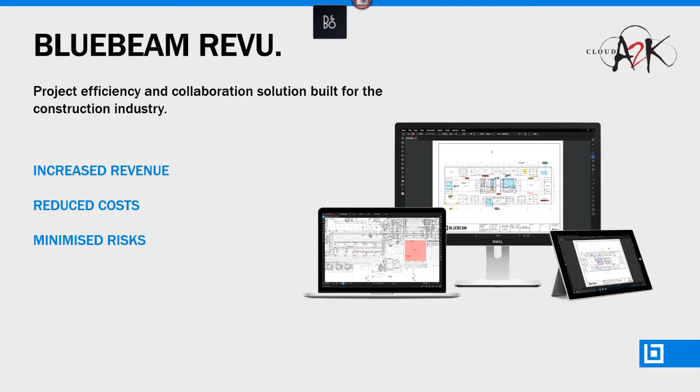So Bluebeam, it's all about going paperless. So we can get everyone in the same system, and we can cut down on the miscommunication that happens, because you'll have one electronic copy which will be worked on for all markups. It's easy to track changes and to track what's happened and who's made the changes. And changes can be made on site as well.

So the PDF contains a lot of metadata, so you can export pretty much a 3D straight from Revit or a native program. And with that, you can get data about what columns you're using, what beams you're using, and a lot of sizes, etc. You can hyperlink in it, use bookmarks, put heaps of attachments. So it's really becoming not just a drawing as such, it is becoming a metadata object, which is fully customizable, and you can investigate the model fully. So you can attach images, and a lot of the 3D data comes through on the PDFs as well.

So it's one file. You can do quantity takeoffs, collaborative review. You can share the studio so that many people can be in the one PDF at the same time. You can manage drawings through it, and have a file system all locked in a single PDF so that everyone can access the full data set. So documentation as well, and field issues. So someone on site can flag something, and that can be uploaded almost straight away using Wi-Fi, and changes can already be starting to be made back in the office.

So I'm just going to open Bluebeam now. I'm just going to bring in a drawing that we have set up, which is just this one here. So it's a small architectural dwelling. I'm going to also add in another sheet.

So the simplest way to look at drawings and compare them is to just simply split the screen. So we have a split screen function down the bottom here. So we can split horizontally or vertically, and split vertical. And this button here is the synchronize view button, so that synchronizes the views. You can also get to these through the View menu, and they've got split here, and synchronizing page, synchronizing document.

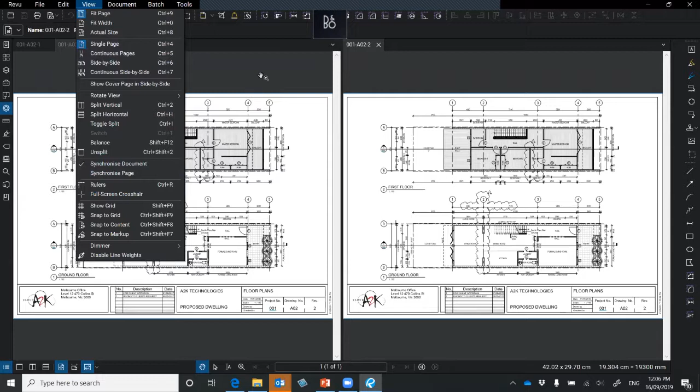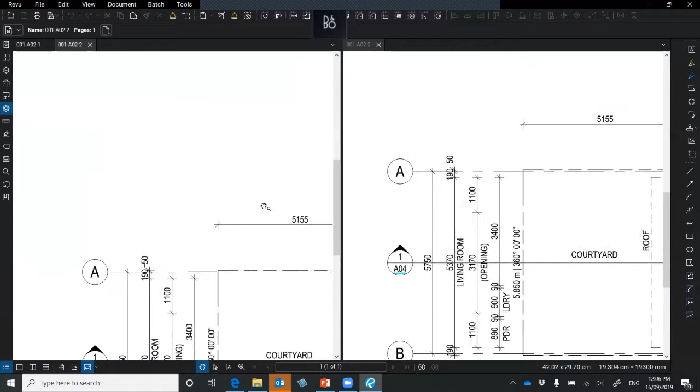So if we synchronize the pages, it will track where we are on the same drawing. So these are different versions of the same drawing. We can go through and see generally what changes have been made. It is a bit cumbersome, and there's better ways to do it. So we're just showing here how it will flow around. And this is the simplest method and closest method to just printing out two different drawings and just following through the changes.

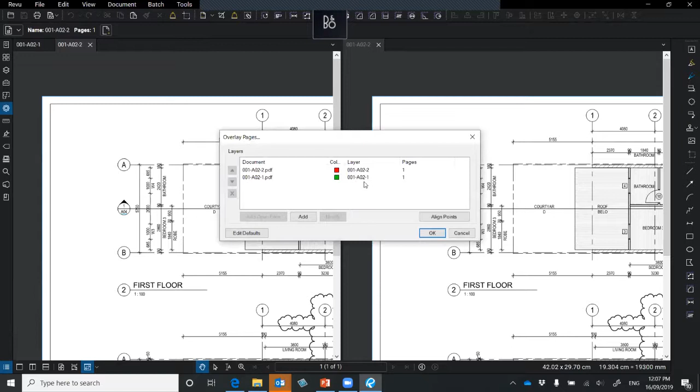So now we're going to overlay the documents. So we can pick that we want to overlay these two drawings. Just say okay, and what that will do is create an overlay drawing. I'll shut this one down for now. Go back to our single page. And what this has done is this has just overlaid the drawings.

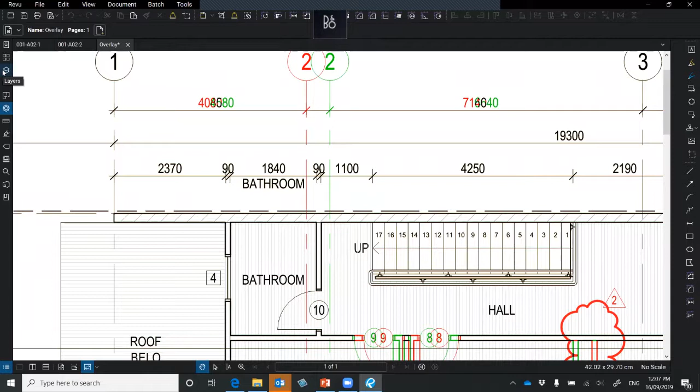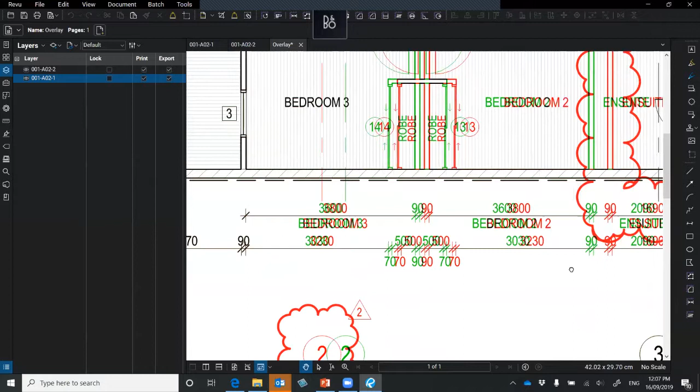We've got the red, and if we look through our layers here on the left, that tells us what drawing is laid on. So we can turn each one of these off. We can see small changes that have been made. Grid 2 has obviously moved. A few changes around the bedroom. Ensuite's changed. This has changed. So that's the simplest overlay, which will just overlay the drawings and show you what's changed between versions.

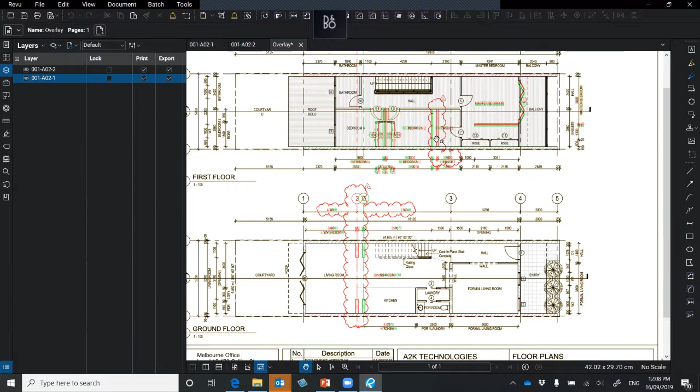So you do want to use this. This is handy when you've got people using the same drawing, but they're showing different things. So you might have an architectural plan or a structural plan, and you can bring the MEP plan straight on top. And that's really the difference between overlay and compare. So overlay overlays the drawing and just gives you a basic view of it and how things have changed. It will highlight each. You can overlay more drawings.

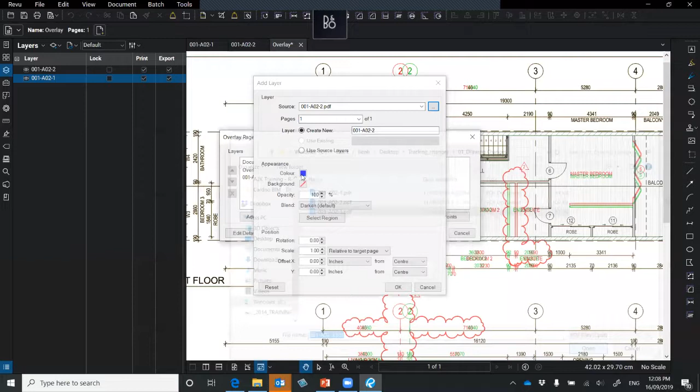So you can easily just add in another one by going back to document and overlay, then we can add another file. We can path that through to this file, bring in that as well. And this is where the appearance of that file, so this new one I'm adding in, will come in as blue. And it will create a new layer on top of that, which I can then turn off and overlay. So it's good for overlaying architecturals with structurals and the like.

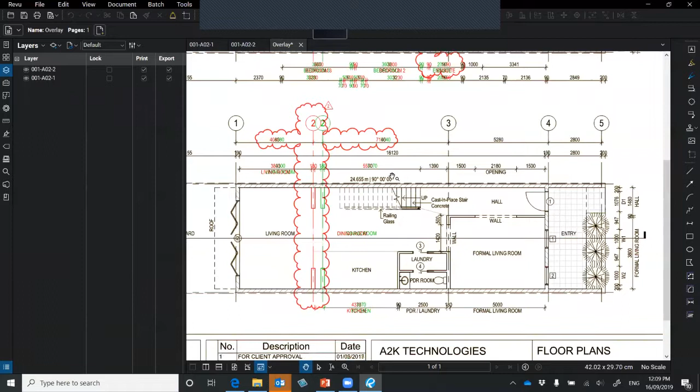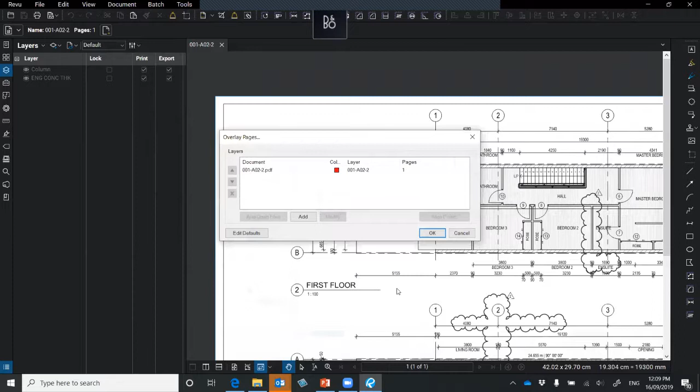If you did want to compare plans that were exactly identical, you'd probably use the compare feature, which I'll show now. So what I'm going to do as well in overlay, I'm going to add in another document now which doesn't line up. So if we overlay drawing 3 here, bring that in, it's going to come in as green. And everything we can see has been shifted, which will happen in a common drawing environment. So the way we fix that is now we know that the files are not aligned. So we'll exit out of both.

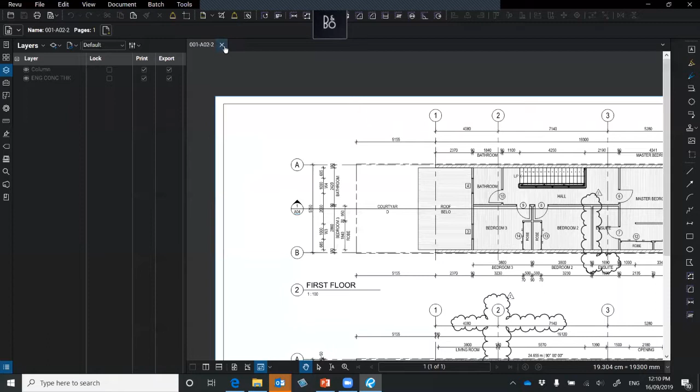Now we'll get through the command just through here. So document, overlay pages. And I'll pick 2 and 3. Attach both of them. This is where we can source, so which page we want to do, where we want to create it, use the source layers, the different colors of the backgrounds. So we'll have the 02 as red, and we'll have the 03 as green.

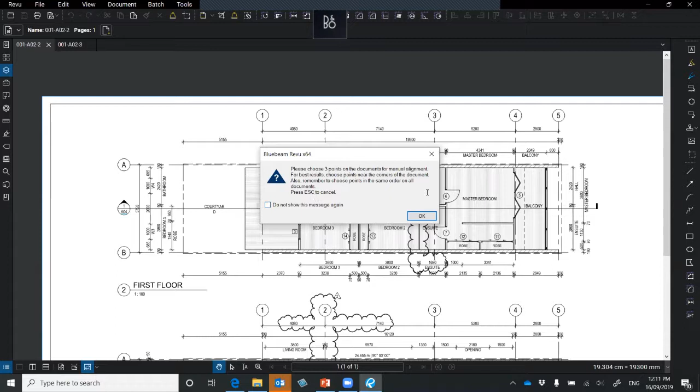And then we get to the next point, which is align points. So we know that they don't line up. The best way to line them up, so it comes up here with a little dialogue: please choose 3 points on the documents for manual alignment. And for best results, choose corners of the document. So we're going to use the boundary because, as we know, grids may change, rooms may change. The drawing sheet, depending on if it came from someone else, may change. But if you're bringing in an architectural and maybe a mechanical drawing, everyone will be using the same boundary. So we'll use the boundary.

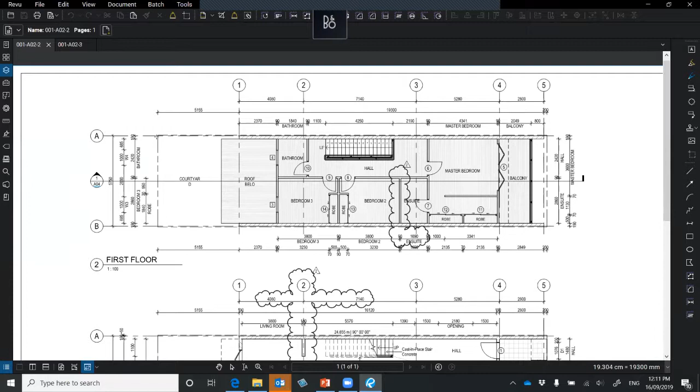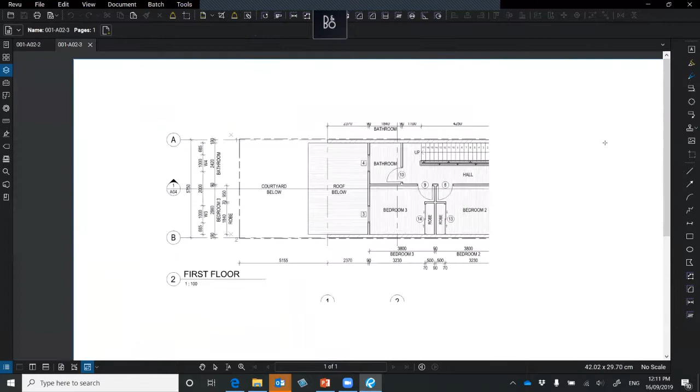So we'll pick 1 point, which will be the corner there, corner below, and the corner to the top right. And now we can see it's taken us to the second drawing, and we can see here that it's put in a grey 1, 2, and 3 over there, and they're the points where it's sourced from the original file. So we're going to correct those points now and give it the comparable points on our new drawing. And now we can see it's brought both those drawings in at the same.

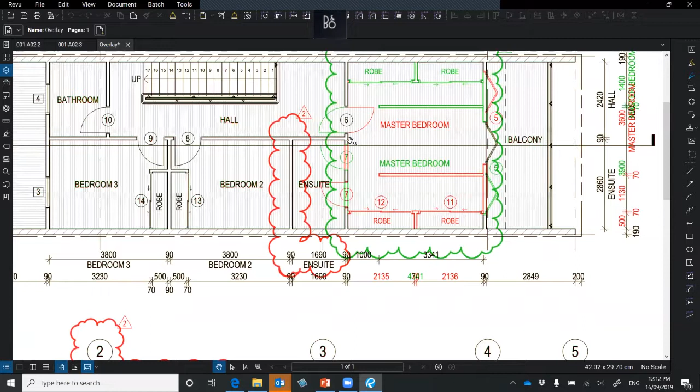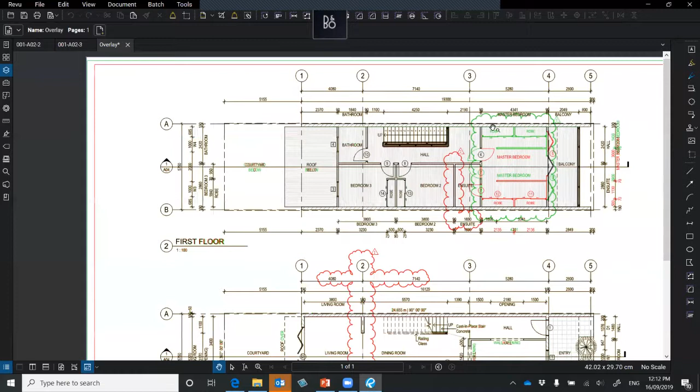We can tell that, especially with the title block, it's been in a different position on the page and it's moved it accordingly. Now we can easily see that the orientation of the master bedroom has changed. A few of the dimensions here. Now it hasn't wiped out the data from both. If you really zoomed in, you can see that it's actually overlaid the green and the red, and there is a small error of alignment there. That's where you can easily see what the changes have been. They've changed some of the wording. They clarified what the opening is in the door, in the wall, and the orientation of the bedroom.

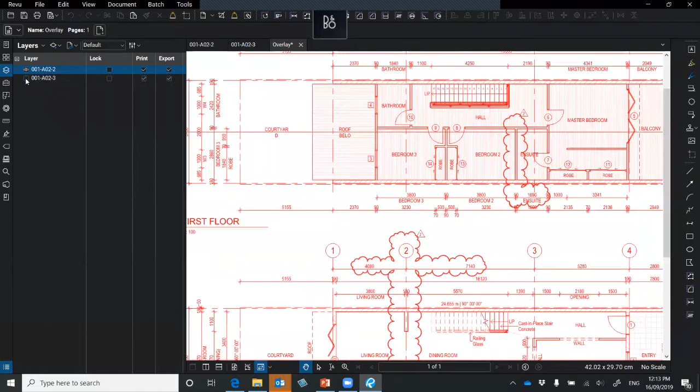So that's with overlay. It will still have the layers in here so that we can go back to each drawing in itself and look at those original drawings through the layers. It's created a new file, which is the overlay. So then you could save that as your overlay comparison page. Another simple way to do an overlay is to do a cut screen. So we can take a snapshot of the first one. So I'll now grab that snapshot. So I can go back into 02, 03 again.

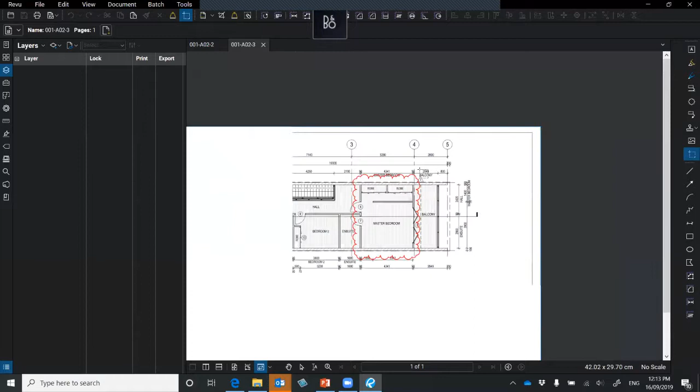And what I can do is paste in place, which will put it in the same place. Now I know that this one won't line up because it's drawn from where the drawings didn't line up. And the way to fix that again, I can select that, go to the properties. I can change the colors of everything that's come in. So that's the first thing I'm going to do, just to clarify for me which drawing I've brought in.

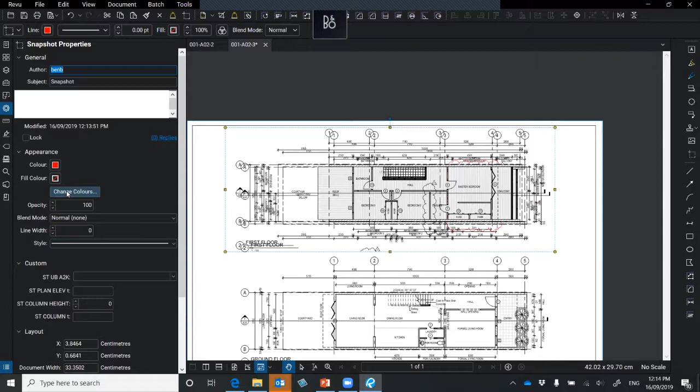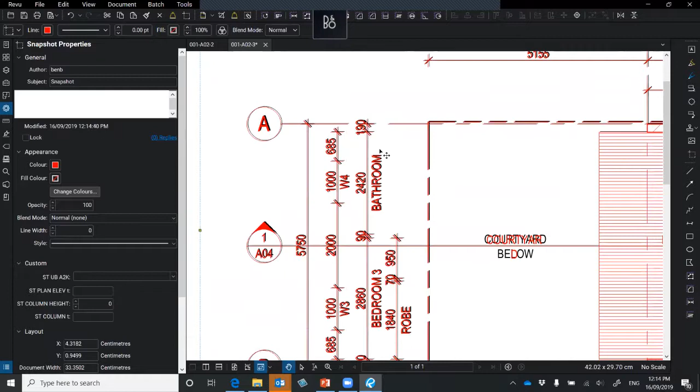So this is all the source colors here, which will change. So I'm just going to make everything red. So you've got to go through the different line styles that it's brought in. And that's probably about enough. Now I can also change the position to line up on grid A, to line up on grid 1. And I'm also going to change the transparency of that.

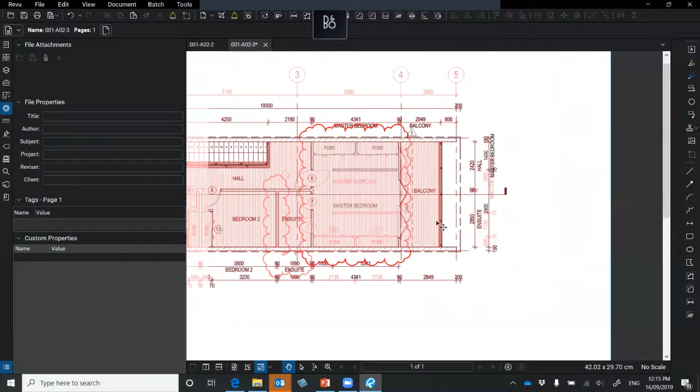So now again, we can easily see what has changed, what stayed the same. So that's another good way to do it. And you can do that for little part plans, even little key plans, little detail plans you have, even details on drawings as well. You can just do a cut and paste, drag it on and change the properties of that file that you brought on, and you'll see what has changed.

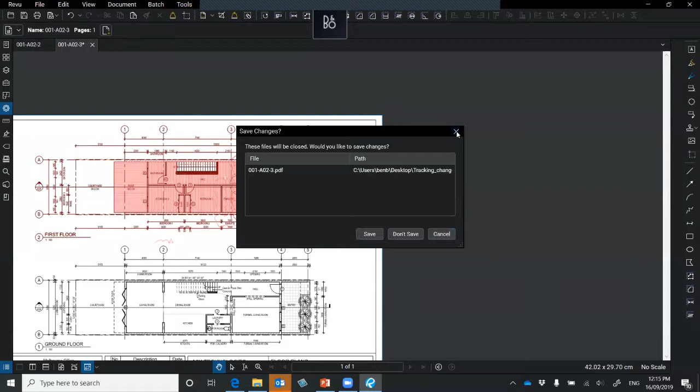So now we're going to show the power of comparing things. So I'm going to shut that down. And if we go back to my desktop files, I'm going to use both these files again, and I'm going to run them as a compare. So I'll go to compare documents, and it's asking for where I want to grab each one. So I'll just grab each one out of that folder, 01 and 02. This is where it's going to put our output drawing, output folder, so I'm just going to leave that there.

And it's got a few other options here. So manual alignment, again, you can pick the points as we did from the other one. It's got a few advanced comparison things in here too, where you can change the tolerance, the pixel, and what we want to show. So we want to show the difference of the things, and we want to cloud it, and we're going to lock those clouds. You can change the fill color of the cloud. I'm just going to make that a half. So I've got a strong color for the red.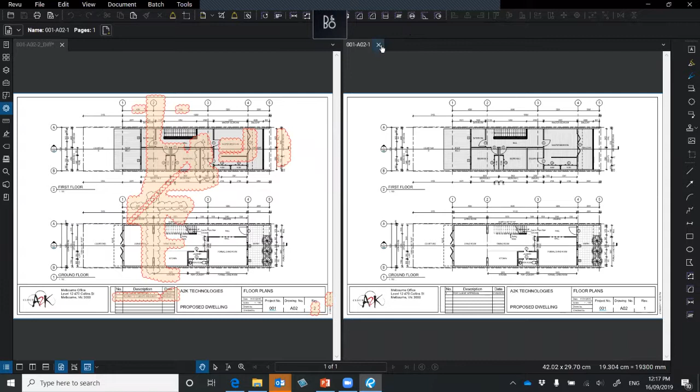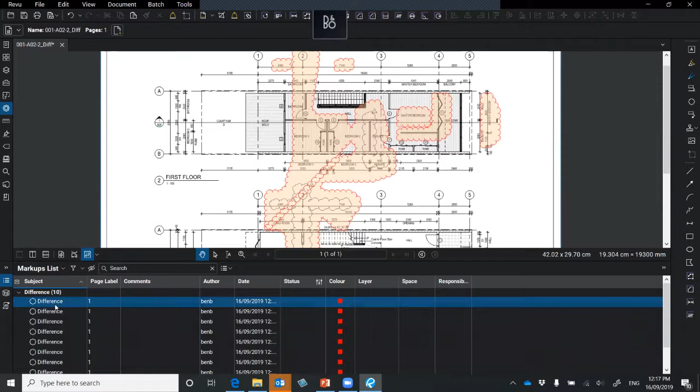So I'm going to shut this file now and just deal with our difference file. So we can see it's clouded all the changes. So it's a great way to cloud changes and show what's happened on each drawing between each revision. You can go through and each difference will be highlighted. So we might decide that we obviously don't want to know the difference in the revision. So I need to unlock the differences. That's just a matter of highlighting all, right clicking, going to unlock. So that will take them off.

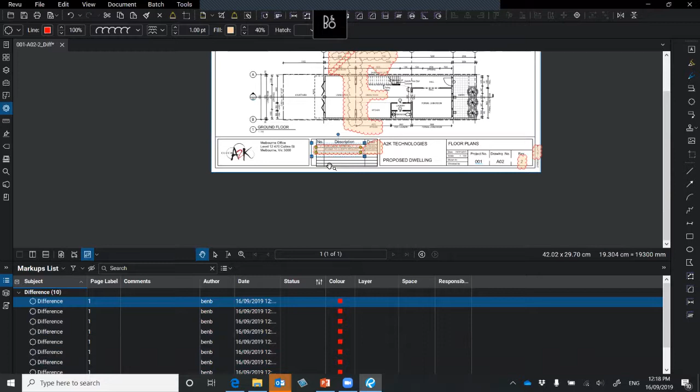And then we can go in here and we can delete that one, keep that one, go through and just highlight the differences, it'll take us to the differences in the drawing. There we go, we've got a clouded change of exactly what's changed in that drawing. So it's quite useful.

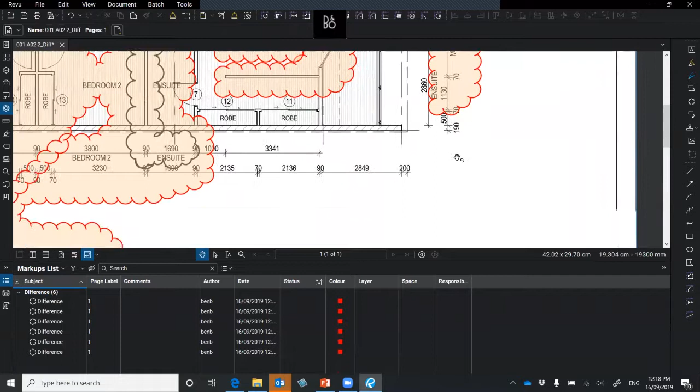What we can do is we can do a batch overlay. So we're going to do that now. So we have both the same features here, both compare and overlay, but we can do it as a batch. So that's where it gets the power if you've got 100 drawings. What we showed before was just if you've got a couple of simple drawings to overlay, but if we want to compare many drawings, what we can do is batch compare.

So we want to add, and we'll add a folder of all our drawings. So we have folder 1, which is 1st of the 5th. And we'll add another folder here of what to compare. So we can see the drawings it's grabbed out of each file. So the second revision had 5 new drawings. The old ones only got the 5 original and the new ones updated 2 drawings.

So we'll go to match pages, which will then pick out, okay, these are the 2 drawings or the 4 drawings that have been matched. So we can make sure we accept that, and the unmatched ones are these 3, which haven't changed.

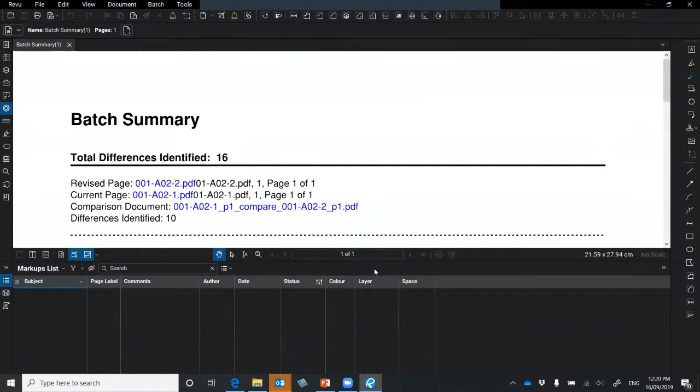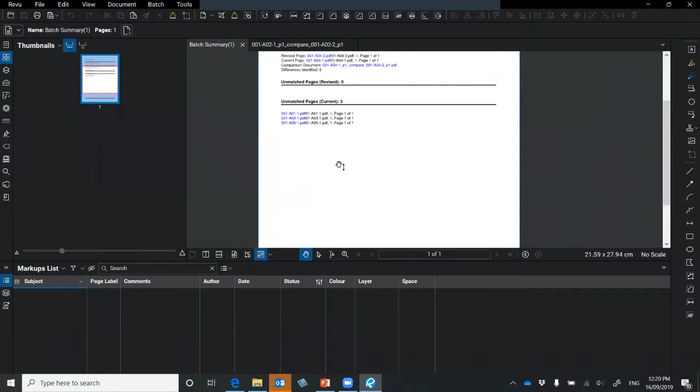So we're going to create a detailed report as well, which will be in PDF format. And what we get here as well is a batch summary. So this has given us a report of what it's produced in here. That is all hyperlinked through the file. So it's given us the information in here, the revised page, the current page, and what it's compared, the differences it's found. So 6 and 10 differences on each one.

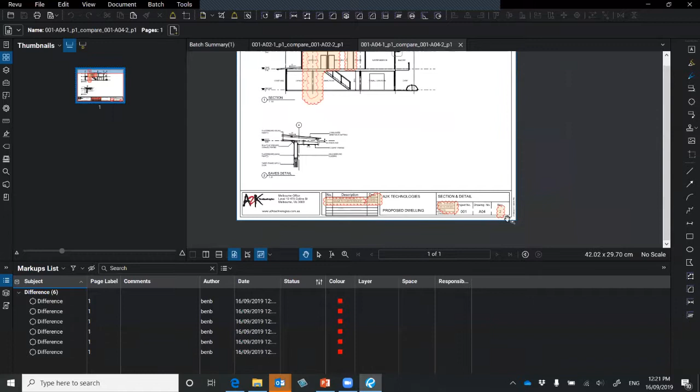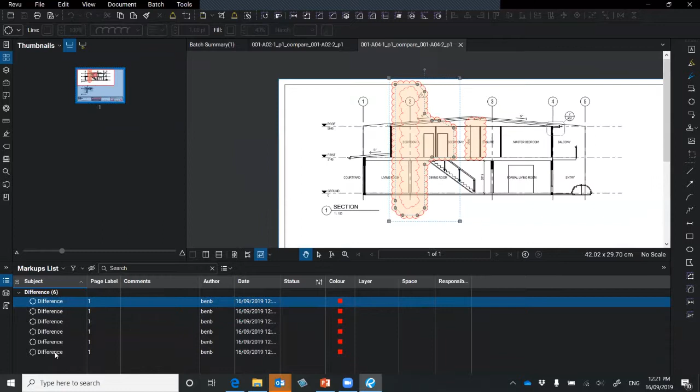And then we can use this to go straight to those drawings. So on our section, it's picked up those differences, and the grid change here. So again, you can tab through those clouds and delete the ones you don't want. I have set it as locked, so you will need to unlock if you want to make amendments to the clouds. So you get the 2 drawings done through, and then the batch summary.

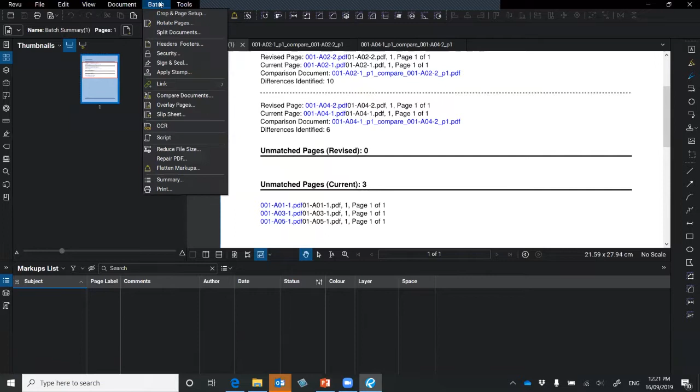So we'll go through that again this time, and we'll use the overlay. So I'll just shut those down. So I'll do a batch overlay through the same method, adding a folder. Match pages again. It's picked up the same errors. So you always need to make sure we create the hyperlink, which will allow you to go from the report to the overlays.

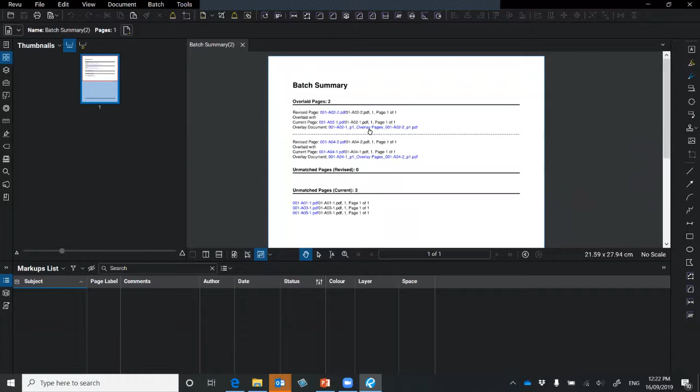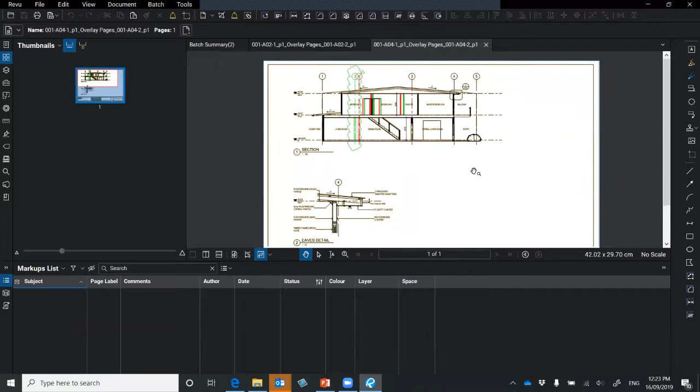Get the overlaid pages. That's where it's done it here. So you can see that grid 2 is changed. It's highlighted all the changes in each one. Same here. So it's a great way of tracking changes because, as we know, not all consultants will get their clouds right. We can see that they've just clouded the grid change, but they've actually changed the layout of the room as well, or location. So we get all these changes that they have made through the project. So it's a lot easier at a quick point to show how that would be done.

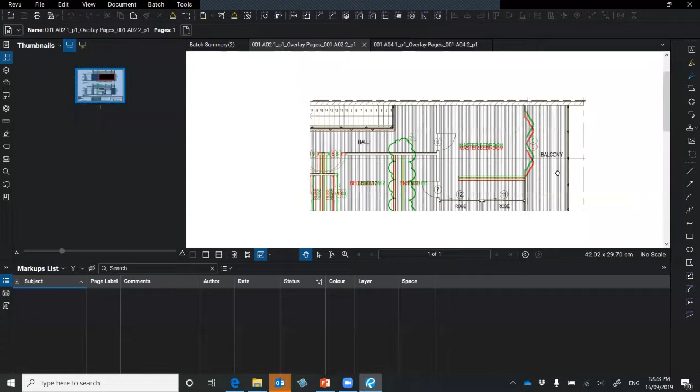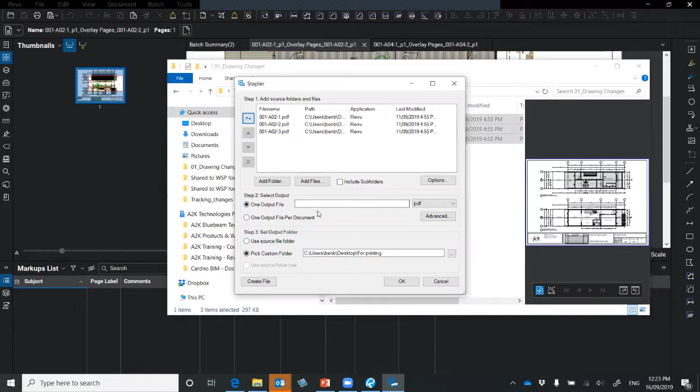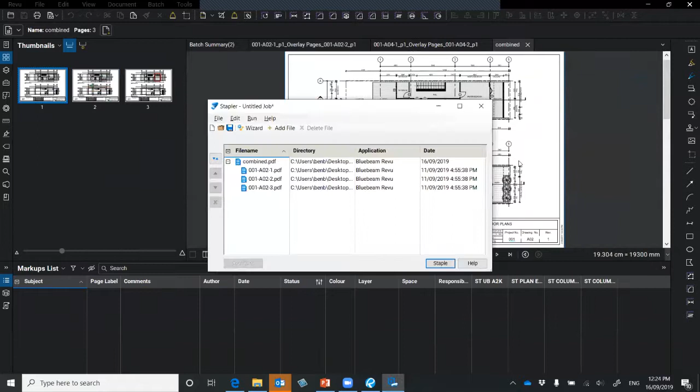Again, I did have someone that used one PDF that contained all these. So if these were combined, we can combine these files just by right-clicking, combining files, make the source output the same. So we can compare that with the other file. But what happens here, you have to always compare apples with apples.

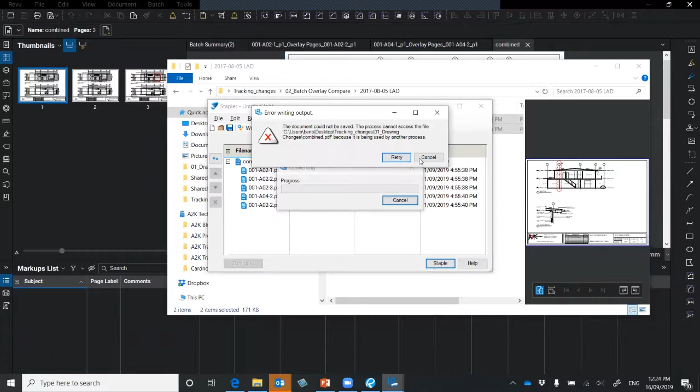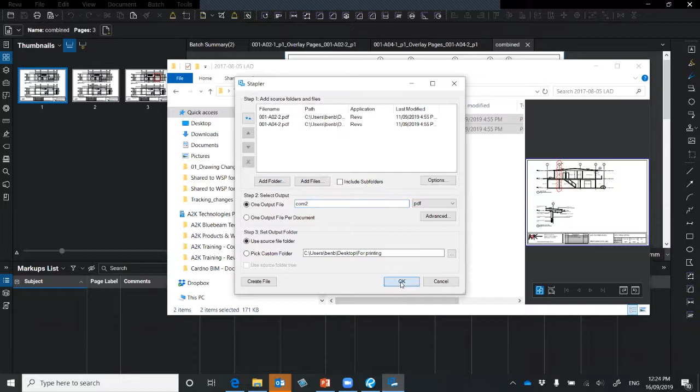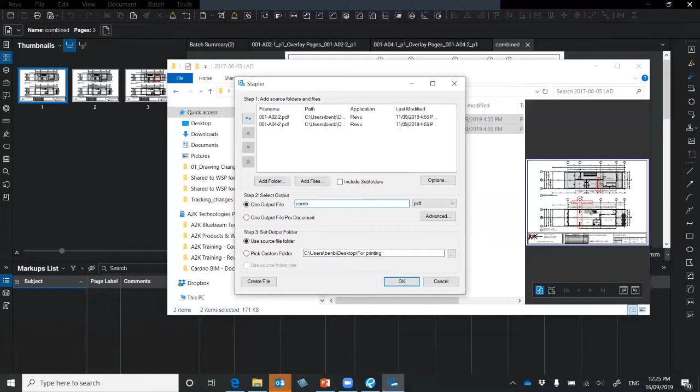So I'll just combine those files. Probably make the same one as the. It's not liking me doing that for some reason. Output file. Yeah, there we go. I just created two of them. So we've got the two files there that we need to combine.

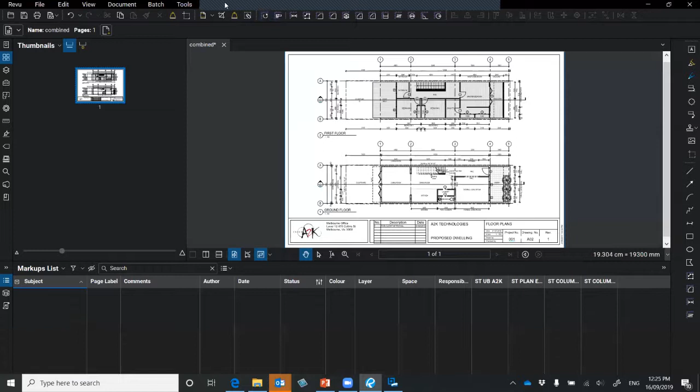But you need to compare apples with apples. So if I'm comparing different files, it's not going to pick up that there's an elevation in there. That's where it gets a bit more complex, and you need to amend each file accordingly. So I would have to go into here, just take out those two files, which sort of defeats the purpose of combining them. And then if I ran a batch compare between those,

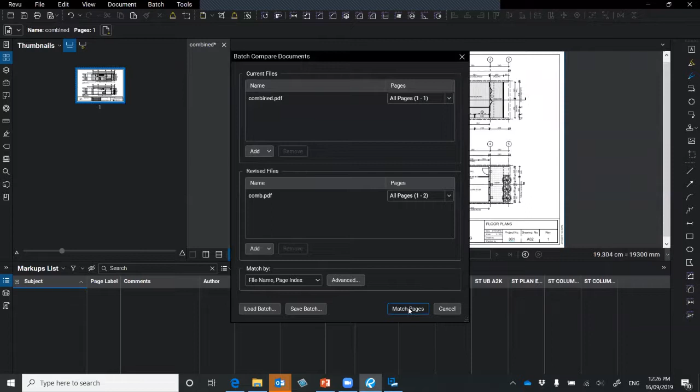so I'll pick out the one file that's changed and combine, so they're all unmatched. So what you do need to do is make sure you match up the exact same with the exact same files to make that work. So if you wanted to do multiple drawings, that's about it.

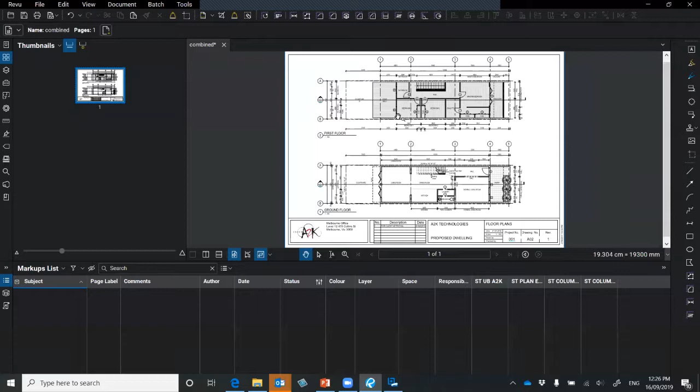So I'm going to open it up for Q&A. Revu CAD, yes. So we've got a question there. Which of the features are not available in Revu CAD? I do think you have batch compare and batch overlay. I don't think you have the batching tools. I think you have everything just as in the normal files. But I'd really need to look up

what the difference is there with the ones. There we go. Batch overlay, compare and overlay is in the Revu CAD version.